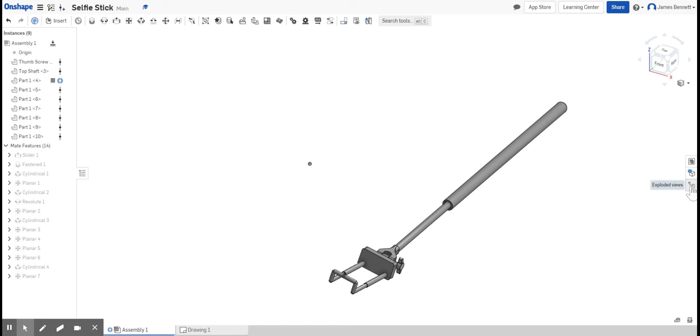Now we have our selfie stick here that we've been working with. I want to click on this option here, highlight over, and it's going to say Exploded View. It gives a brief description of what an exploded view is, and we can learn more for an in-depth description. But what we're going to do is see how to pull this apart so we can see each individual piece in our drawing. I want to click Add an Exploded View, and that's going to start my Explode editing window.

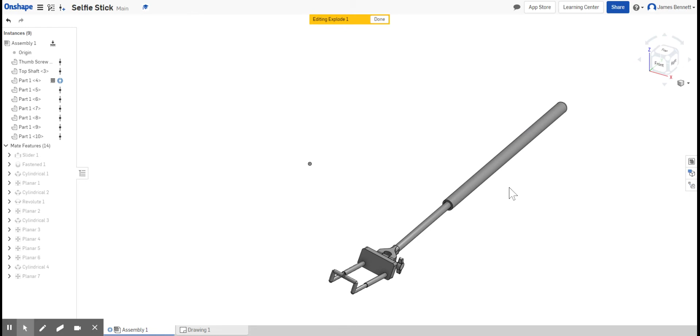I want to go ahead and minimize this so I don't have to worry about looking at it. I want to click on this piece here. Now, if you recall, we did anchor this by fixing it to a position, but since this is an exploded view, I am able to move it. So I'm going to drag it back, make sure we have plenty of room here, and we'll see a dialog box open up. Now I can set the exact distance I want this to go, but for now I just want a good visually appealing distance, and I'm going to hit a green check mark.

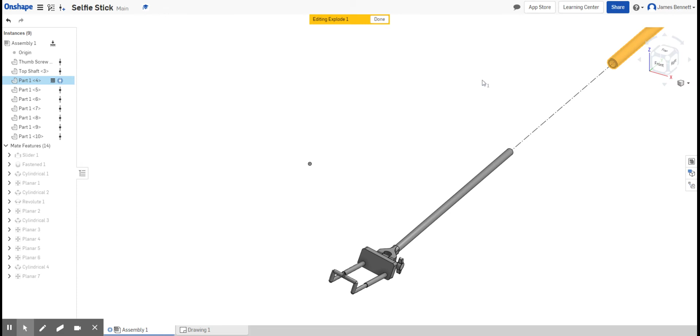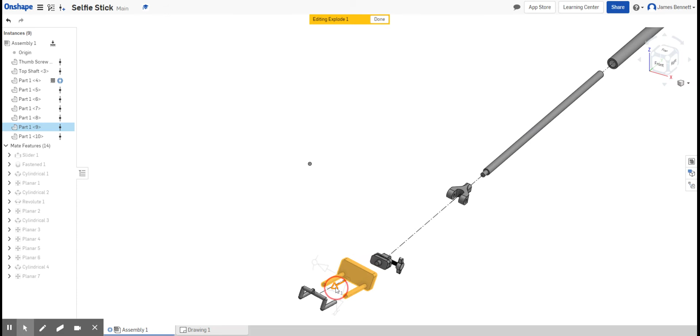I want to click on the next piece of the selfie stick, and I'm going to drag it back. Again, not completely touching, but far enough away from all of our other parts, and a green check mark. And I'm going to do this with each individual piece in the selfie stick. I want to pull these a little bit forward so I can open that up and be able to see more of what's going on behind. Again, making sure to hit that green check mark after each piece.

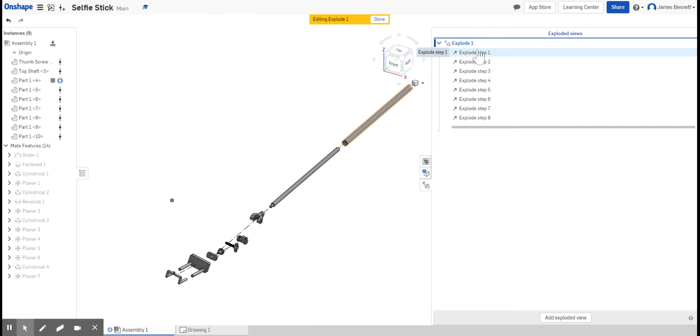Now what this is going to let me do is open this up so I'll be able to see each individual piece that was in the selfie stick, and we're going to see the advantage of that in a moment. I'm going to pull back that little pin last and hit my green check mark. Now, if I come over here, I see I have all these steps laid out, 1 through 8, and I'm going to click Done. If I right-click on the Explode, I can hit Activate Explode 1, and it's going to activate for me. I'm just going to leave it saved as Explode 1 and make sure again I select Done.

Now, over here, I have my drawing. I was going to load this; this is a drawing we worked on before. I'm going to go over to Insert View, and I have the option for Front and an explode position, but it's set to default, and I do see Explode 1 listed.

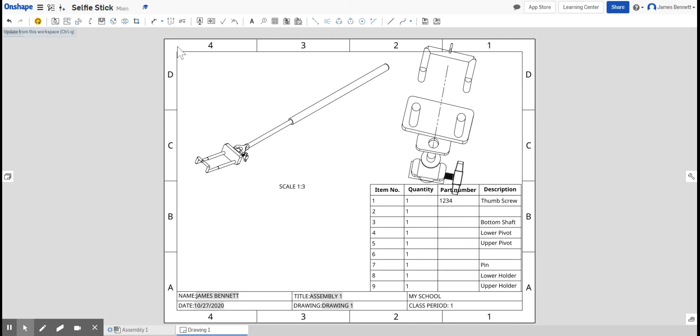Now, in the event this does not work, you may need to refresh this view. So let's just delete this from here; we're going to look at that again. I'm going to click refresh, and what that's going to do is add in any changes I may have made to this drawing. So sometimes that exploded view may not show up if the drawing's already open, so let's just double check and make sure we still have it.

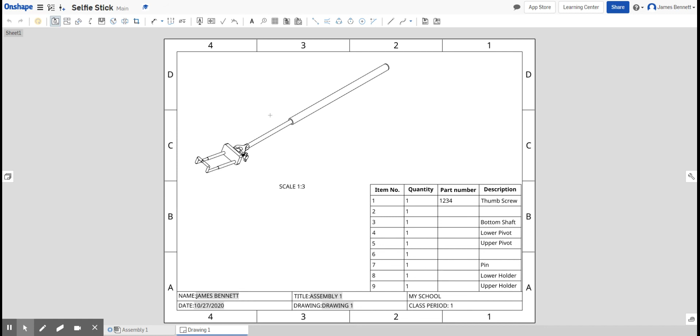We're going to do an isometric view because we want it to be an isometric drawing. I'm going to select Explode 1, and I'm going to try to place that over here. So let's see if I can get my drawing to work. There we go, so we have a very large drawing here. I'm just going to double click on it, and notice it is far too large for us. So I'm going to change this down to 1 to 6 and see how that looks. That looks much more appropriate, so I'm going to hit my green check mark.

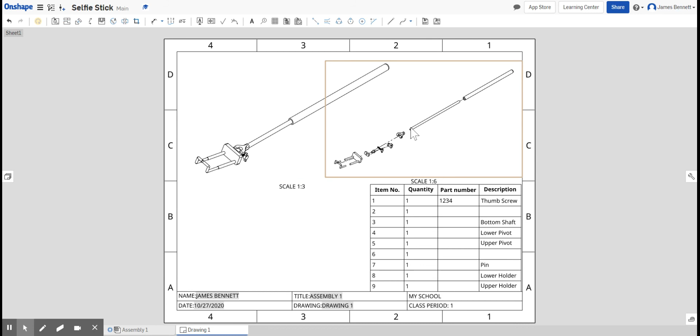I'm going to drag this up to a reasonable position. Now it does give me my scale of 1 to 6. It's obviously smaller than the actual isometric drawing that I have here, and I can adjust these if I want so I have more room in different areas. But what I want to see here is I have all my individual parts and my part list. Now these relate directly to each other.

So what I'm going to do is come up here and find my balloon, and that's going to let me create a callout. So here I have my balloon for a callout, and I'm going to select this part here, and I want to drag out. Now notice what we see in the dialog box that says table item number—well, we don't have to replace that. That's actually a command coming down here saying on the table, item number 3 is the bottom shaft.

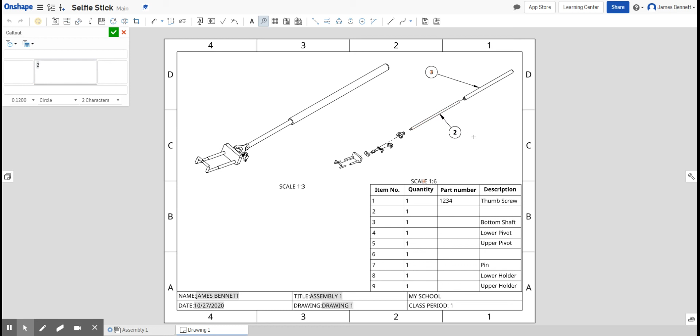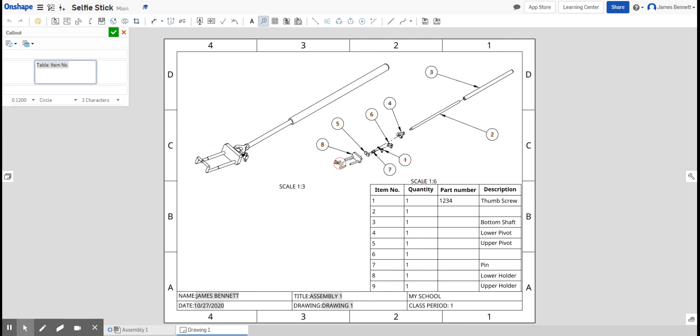I can also come here and add another callout. I can do this with each individual part, and it will label it on the part list. Now this can be very useful if you're trying to figure out which parts you're supposed to use on the part list. So instead of trying to put the names on each one of these parts, which would be hard and difficult to see, I can create a drawing that identifies all 9 parts using the balloons and then relates them directly to our part list.